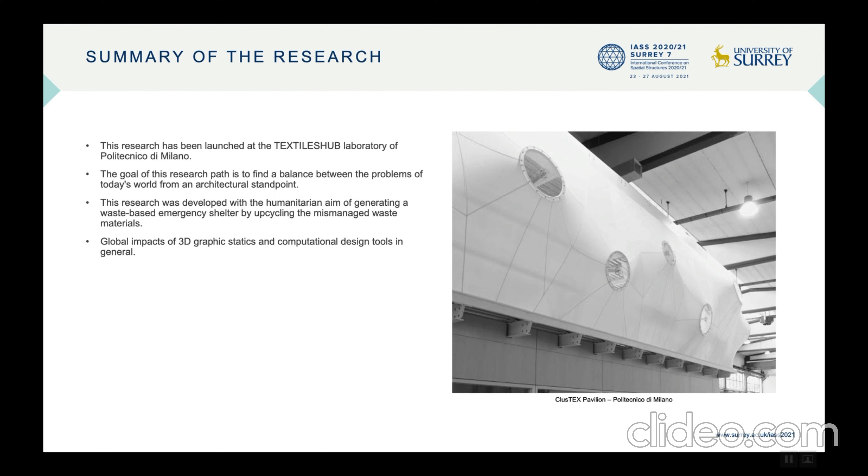The aim of this research is finding a path in order to balance between the problems of today's world from an architectural point of view, and also we are trying to generate a waste-based emergency shelter by upcycling the mismanaged waste material. No one can ignore the fact that a large group of people are suffering from lack of housing.

The United Nations High Commissioner for Refugees announced that at the end of 2019, 79.5 million individuals were forced to flee their homes. It has caused the number of people in need of housing to increase. And for sure, building an affordable house cannot be the best choice, especially for those who sleep outside each night. Therefore, we need temporary and emergency accommodation as a short-time action.

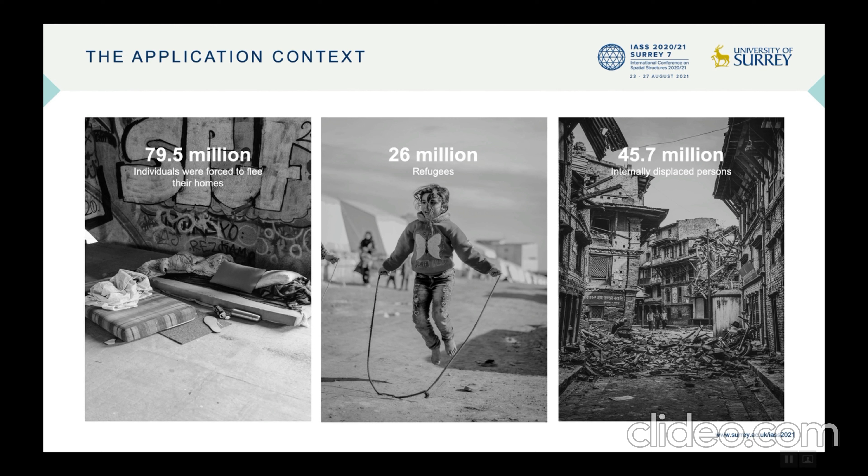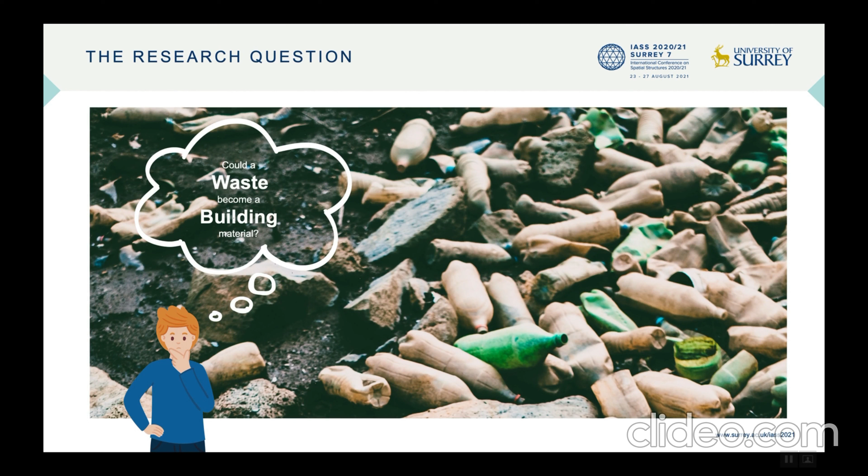Moreover, comparing the world population in 2020 versus 2050, we will experience an increase of 2 billion people. I do not want to talk about the different aspects of these goals, but I just want to highlight two crucial topics here. First of all, we need more resources for construction. We will surely produce more waste. All in all, the main question of this topic is, could the waste become a building material? The result of this investigation can open a new door in the construction world.

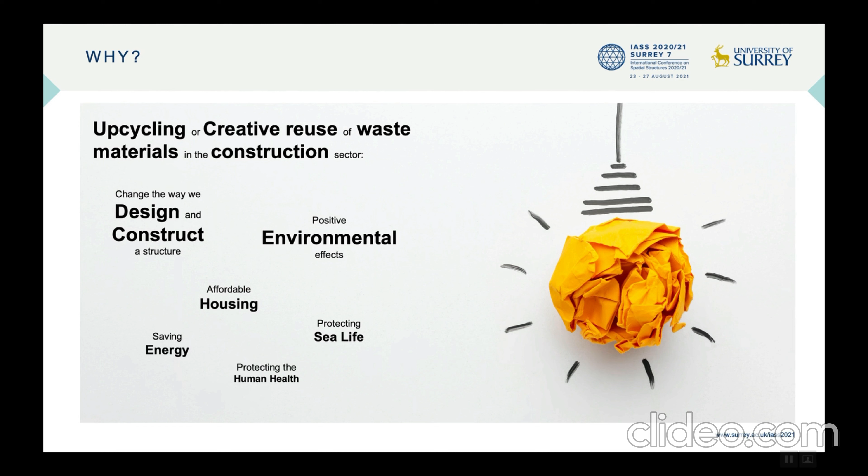Upcycling or creative reuse of waste materials can change not only the way we design a structure, but also the way we construct it. Positive environmental impacts, affordable housing, saving energy, protecting sea life, and protecting human health are other positive aspects of this creative reuse or upcycling.

The principal aim of the waste-based shelter, as I mentioned before, is using waste material for designing and constructing. Simply, the waste-based shelter can be divided into two parts: the waste-based structure, which is the purpose of this research, and the bottle members are the main elements of it, and also the waste-based membrane, which we are going to talk about later.

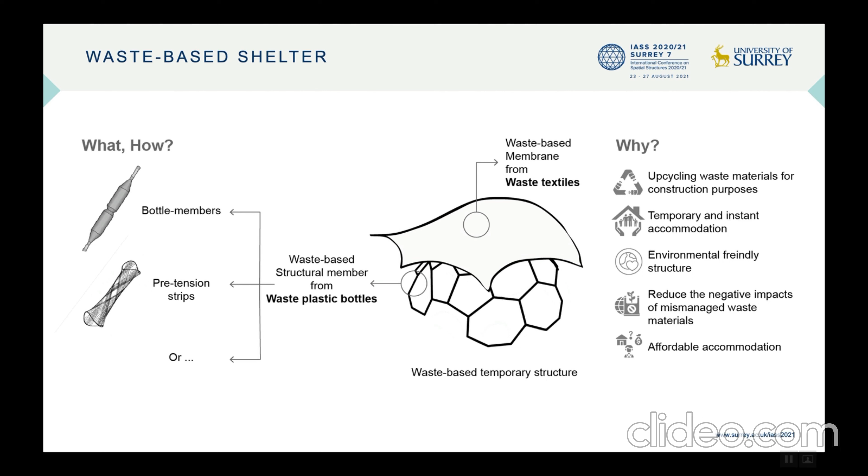The material that we are going to use for our waste-based structure is waste plastic bottles. Previously, lots of researchers tried to use waste plastic bottles in the construction field. EcoBrick, which is a bottle filled by other waste material or other substances, is one of the most famous examples in this field. Some research groups, such as PetMat, try to design a specific shape for bottles, and as a result, they are designing some furniture.

Both of these cases use bottles not as a structural element. They are using bottles as a covering, like a brick. But the third solution is using the bottle as a bottle member. A bottle member is a structural component that contains two plastic bottles which are connected together from the bottom part. I'm going to talk about it more at the end of this presentation.

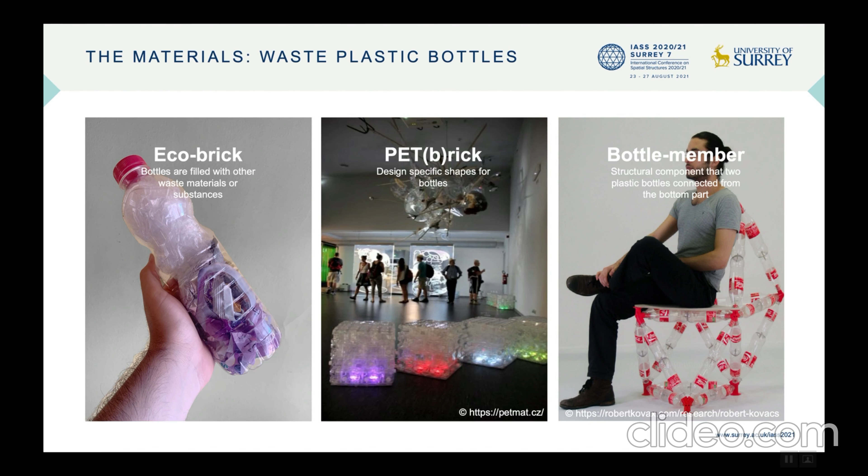For the form finding method, we are considering 3D graphic statics. Why 3D graphic statics? Because it gives us the possibility to generate the best possible geometry, and as a result, it reduces the overall forces applied to each structural member, and we can use environmentally friendly material more easily. Also, it gives us the possibility to control the form and forces, and the role of the architect and designer in the final solution is not negligible.

Each design process needs some inputs and perception. Here, we are going to design a shelter, so we have to consider some inputs and perception. The first important thing is that we need at least 3.5 square meters for each person, considering that we are going to design a shelter for a family of 3. Also, the minimum height of this shelter should be 2 meters.

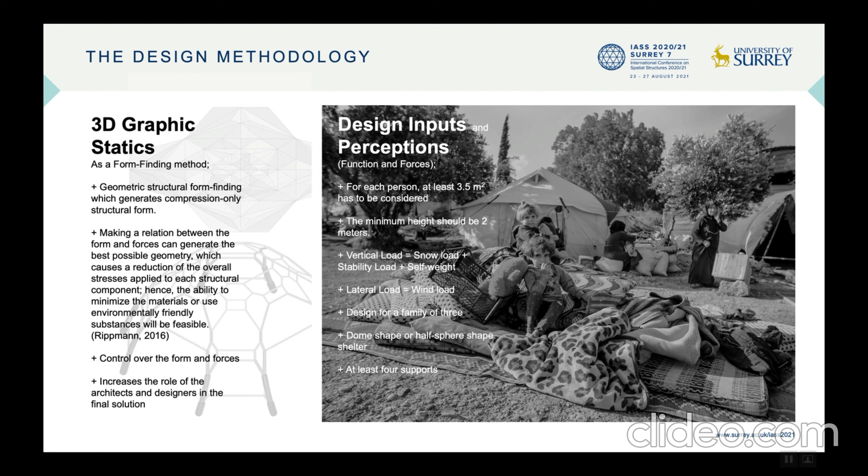Moreover, we are also considering the loads. We have vertical loads, which can be a snow load, a stability load, and self-weight, and also we have a lateral load, which is more or less equal to the wind load. And also, we need at least 4 supports. It's our perception, and also the shape of this shelter can be a dome shape or a half sphere shape.

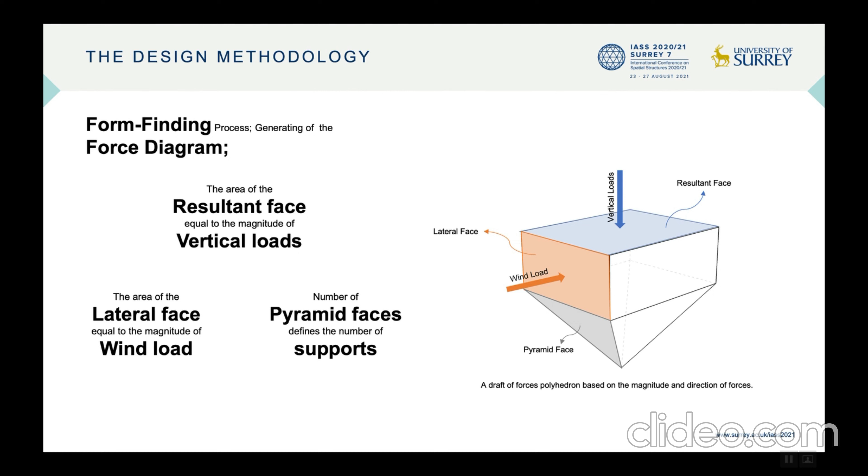According to the European Code, the magnitude of the loads was calculated and used to generate the draft of the force diagram. The most important issue here is that the area of the resultant face should be equal to the magnitude of the vertical loads, and the area of the lateral face should be equal to the magnitude of the wind load. Also, the number of the pyramid faces defines the number of supports.

Before starting to subdivide the polyhedron of forces, two constraints were taken into account. The first is the fixed length of the bottle. Hopefully, there is a reciprocal relationship between the form and force diagrams in 3D graphic statics. The area of faces in the force diagram can define the length of members in the form diagram. Therefore, in subdivision of the force diagram, thanks to the physics engine simulation, the area of faces was considered around the length of the bottle. On the other hand, instead of considering the lateral and vertical forces separately, we decided to consider the resultant force of these two forces.

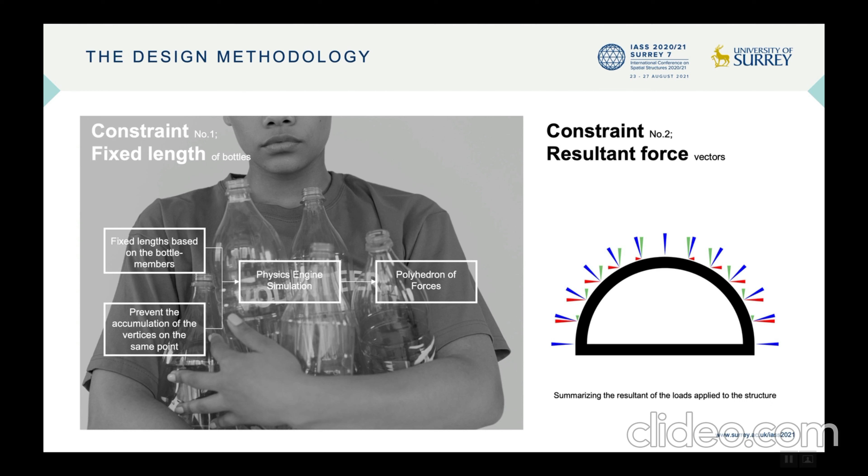And finally, after the subdivision of the force diagram and applying the two constraints that I talked about before, we can generate the form diagram. Our form diagram, or in other words, the waste-based structure, is completely related to the force diagram. Here, we are going to add another diagram, which we call the material diagram, which specifies the type of bottle for each structural member.

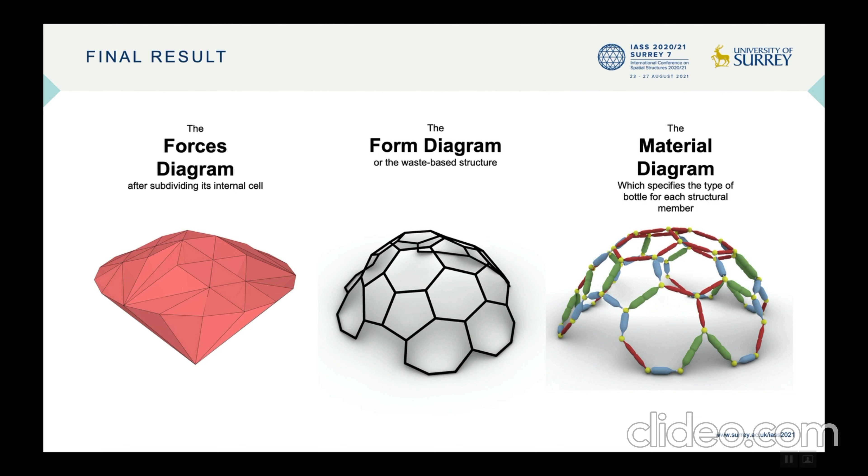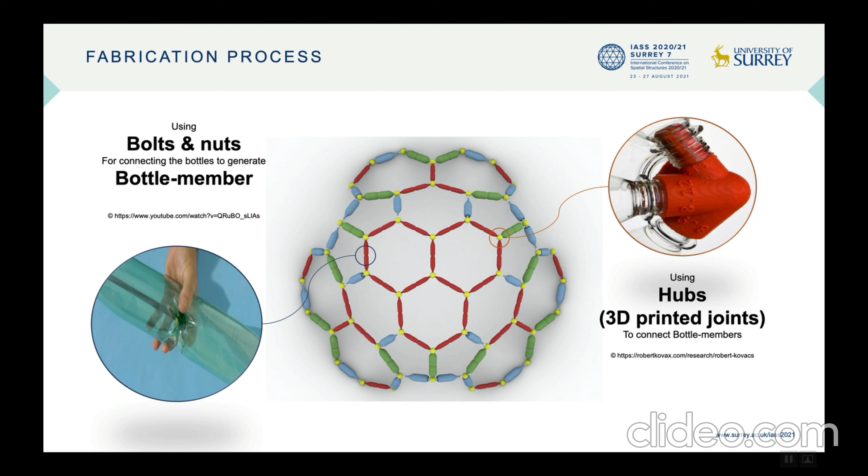As I mentioned before, the length of the bottles is fixed, but we are using three types of bottles here. We are going to use bottle members for our waste-based structure. In order to connect the bottles and create the bottle members, we are using bolts and nuts. And also, in order to connect the bottle members together, we are using hubs. Hubs are 3D printed joints.

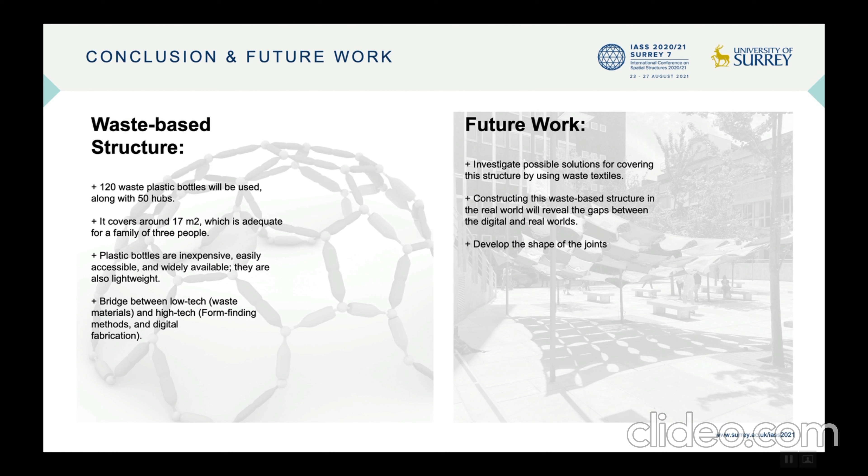In conclusion, the waste-based structure is generated by using 120 waste plastic bottles along with 50 hubs. It covers around 17 square meters, which is more or less adequate for a family of 3 persons. And I would like to thank you for your consideration, and finish my presentation with this sentence: waste is tomorrow's resource.